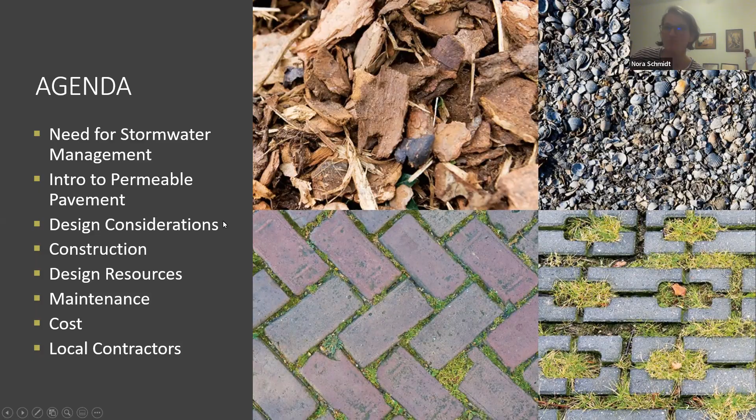This is a handy dandy graphic that the Philadelphia Water Department put together, and I think it really sums up why we need to be concerned about stormwater and what's running off your property. In your natural environment, 40% is evaporation, only 10% is running off into your local waterway, and the other 50% is going into the ground. Versus in our built environment, in residential neighborhoods and cities, over half is running off into your waterway. So permeable paving is one of those options that tries to reduce the amount of runoff and promote infiltration into the landscapes on your property.

I'll go through this stuff, but if you have a pressing question, feel free to jump in. Otherwise, I can answer questions at the end.

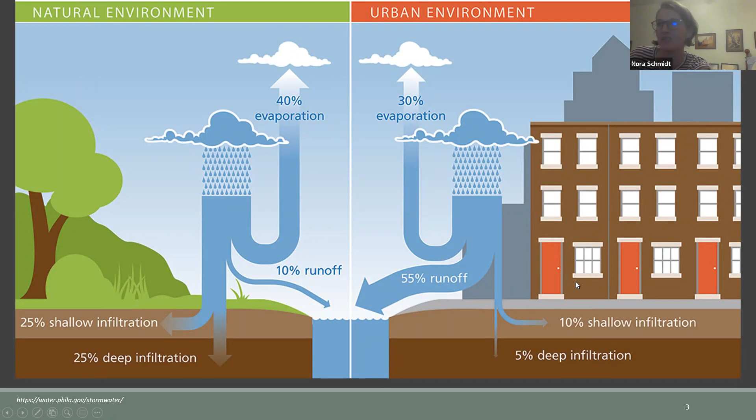Infiltration is anything that lands on a porous surface, like anything that has plants or dirt. Pavement has very little infiltration—there are dips and bumps where a little bit will get stored, but it won't infiltrate into the ground. The deeper the root system, the more infiltration, because it can follow the root structure down further. So if we just reduce paving and turn it to turf grass, that's one step in the right direction.

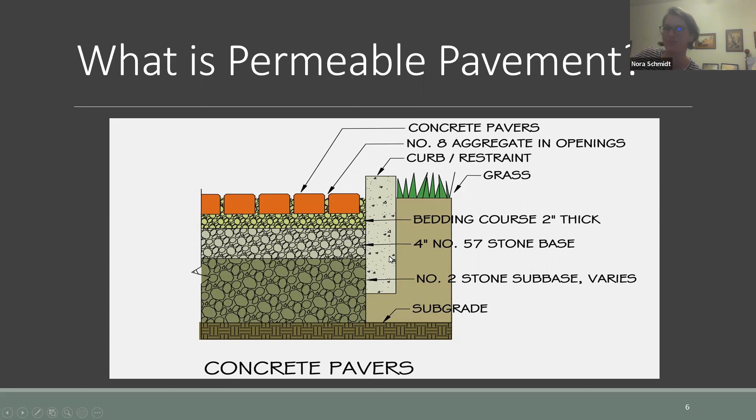Okay, so here are generically your 3 P's: your paver, your permeable paver, which is probably the more applicable stance for a homeowner to do is put a paver in. You have permeable concrete, and then you have permeable asphalt. Both permeable concrete and permeable asphalt we're not going to talk about tonight because they're basically infeasible for small projects, since the amount of material you need to acquire to make this cost effective is prohibitive.

So this is a good comment - some driveways you've seen that look like this aren't permeable, because they'll have literally mortar or concrete in between these gaps, and that makes them impervious, same as a typical asphalt driveway. So what makes it permeable is when you put the stone or sand in between.

All right, so now we get into what we're promoting as one of the more useful things homeowners can add to their property: these pavers. They come in like bricks, in all different shapes and sizes and colors, but they'll typically have something like a little block that sticks out that sets up the difference between the two blocks, giving it space on its own.

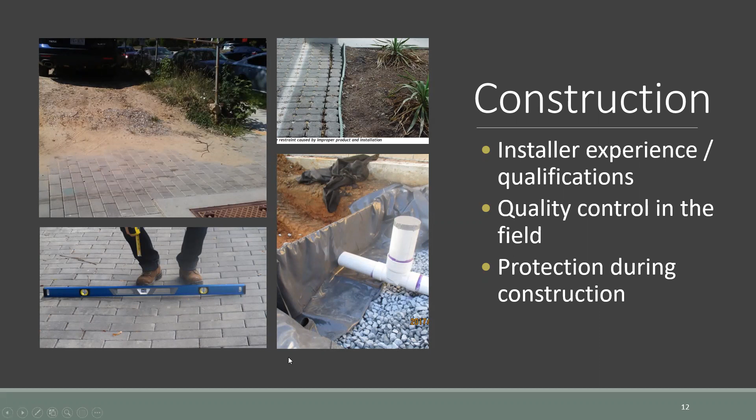So Sandy kind of got into a bunch of design-related topics, like if you have a contractor, there are a bunch of contractors that have done porous paving and pervious pavers and they will know how to do it. But if you decide you want to design it yourself, there's design guidance for homeowners. I can share the PDF, but this design guidance from Montgomery County, Maryland is really, really good for homeowners, like driveway type things.

Sandy touched on how much you could be spending, potentially $30,000 on a driveway. So I thought I'd share the generic cost: for a porous paver driveway, you're going to spend $30 to $50 per square foot, compared to less than half of that, $4 to $15 per square foot, for your standard concrete driveway. So yeah, it's almost more than double that cost.

So it is something to be aware of, but you can go the way of doing just strips of paving, just doing some sidewalk, just doing whatever. If you were going to do a typical paver driveway without the porous option, it's going to be in the realm of that cost as well.

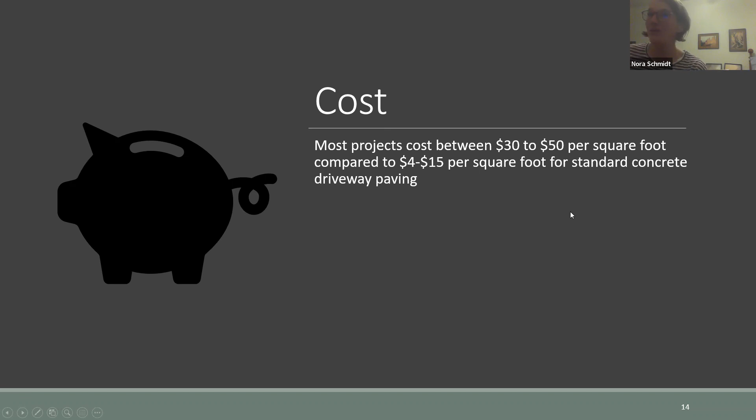All right, so touching on the maintenance aspect. As a preventative measure, during construction, place all your debris down slope of the project. Once it's installed, you're going to need to remove it. Don't dump a truckload of sand or anything on top of it. If you can, remove it and sweep it.

After a rain event, look out and see how it's doing. If it's ponding in a weird spot, maybe something is clogging it and you can just brush it off. Don't store anything or put anything loose nearby. If you could have a strip of grass and then your mulched garden bed, that's preferable.

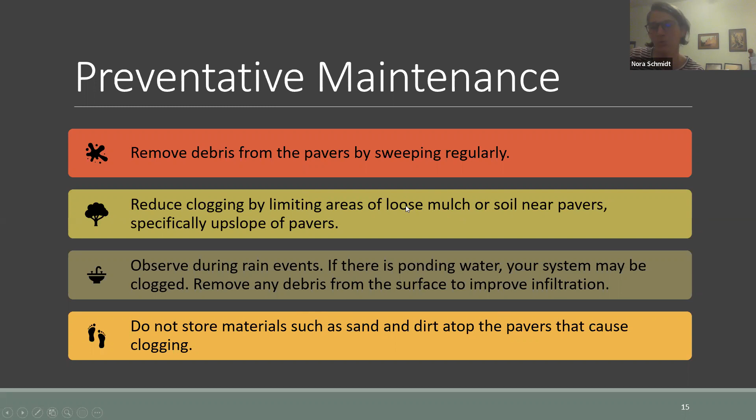All right, so then winter maintenance. Our winters are getting a little less icy and snowy, but when snow does accumulate, porous paving might actually help with ice a little bit, but it won't ice over faster. It's not going to be really that much different than your typical pavement.

And if you have somebody scrape your driveway, you want a rubber edge or a hand shovel. You don't want to be pushing things around and messing up the porous nature. Also, don't use salt - it can damage the actual chemical qualities, I think. Just use sparingly, or avoid it if you can.

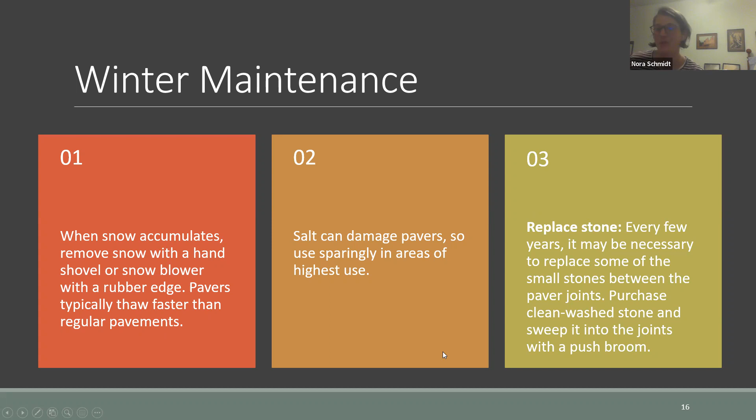And then, like Sandy said, the contractor might have to come out a few years later, maybe a year later - you yourself might have to add some sand or small stones in between the joints, just because things do move around. So that's okay.

All right, so there are a bunch of local contractors. These were a few specific ones in the Havertown, Delco area, but the Philadelphia Water Department has a list of contractors that do porous pavement, and it tells you exactly what they do. These are all people that have worked with the water department in their local residential program - contractors all over the area, some over in Delaware County. So I would start with this list first, since they're vetted by another county, another city.

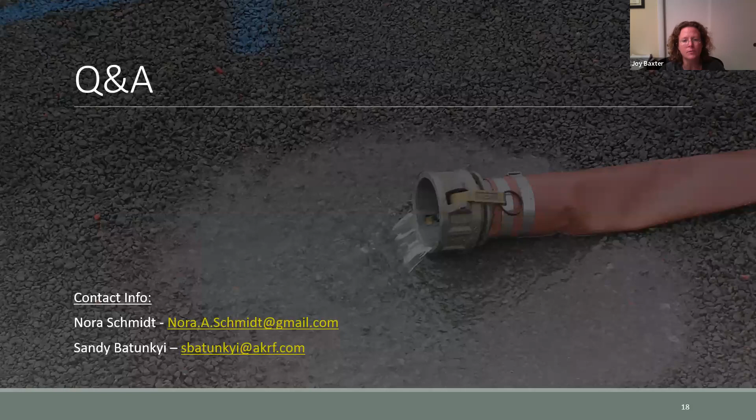Are there any other questions? We can explain more things, answer questions. I have a question, and I'm sure this depends on the product, but how much better is having these materials down versus just grass, if it's not sloped?

That's a good question. If we get back to how deep is your storage, and how much void space or area there is for water to go - grass and soil have very little. The typical grass root zone is only about 1 to 3 inches, so you're only disrupting the clay that much. Sandy, you could speak to this because you know.

I think it really depends on what your application is. Obviously, if you want to have a paved area - paved being the operative word here - these materials are much better than doing something non-porous, like regular asphalt or regular concrete. So if you want a driveway, you wouldn't necessarily want to keep it as grass. If you put in a paved driveway, going the route of porous is better than going standard.

But that being said, all things being equal, the best thing is, if you don't need to disturb the soil and things can just be vegetated, even if it's grass - the grass will literally be more permeable than either of these porous pavement options. So the question is whether it's better - it's a better product if your intention is to have an area that's paved. But if it's not paved, then just keep it vegetated, like grass or other plantings.

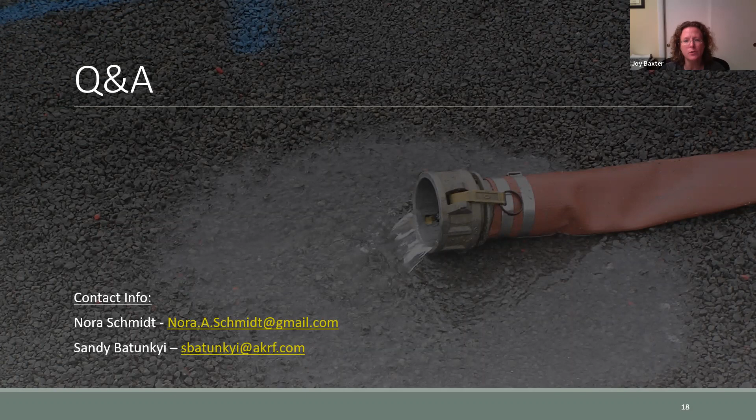I was just thinking for a driveway, if somebody was considering doing these porous pavers versus the 2 strips - I see. I would think the cost of the 2 strips would be far less than the porous pavers. Correct. Sure, yeah, of course.

Back to basics - if somebody just wanted something to be porous, they could just have a gravel driveway. That's sort of the mother of all semi-paved, porous options. But that's correct, I think. If you're looking at those concrete strips, the last time I put an estimate together for pavement, it was probably about $15 per square foot.

Depending on how much base and everything you have, it's anywhere from $4 to $15, depending on the thickness of your concrete and your base. So in some ways, it's obviously about your square footage, right? Your square footage for those tire strips is going to be less than if you were to pave over your whole driveway.

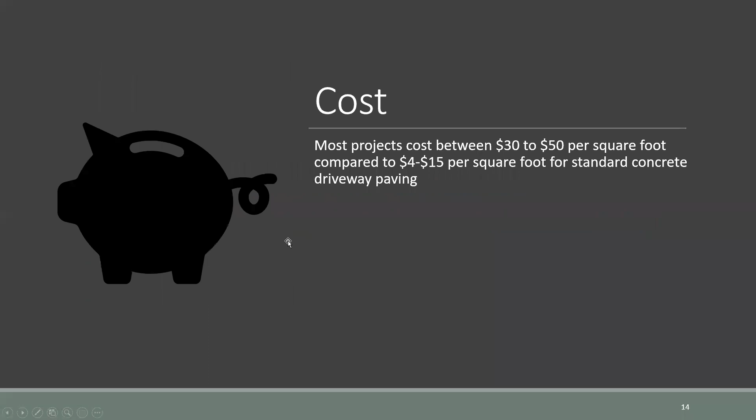By the way, so my porous pave experience is—I have a corner roof downspout that the water runs off so quickly that it's always been a waterfall over the edge forever and ever. And that sort of exposed one of the weaknesses of porous pave: there's a big divot right there where that waterfall hits the porous paving.

The other lesson learned is porous pave is really difficult for a contractor to do a good job—they really have to be skilled. You definitely don't want it for a vehicle on. I think some of the arboretums I've seen porous pave as walking paths—I think that's the best application for it.

Right. Yeah, I think it comes back to aesthetics—it looks really natural, or naturalized, I guess. And I know someone who installed Gravel-Lok. The advantage for—I don't think I would ever recommend a do-it-yourselfer to do porous pave.

With Gravel-Lok, you can actually set decorative stone, and this fellow did patterns. He worked with his gardener, laid everything in, compacted it, and then poured the polymeric material, sprinkling it over and letting it set. That sounded like an easier way to do it than what I saw my contractor do with the porous pave, where they were mixing everything in a little concrete mixer and it was like beat the clock to get it in. I think they didn't understand that you can't just screed it like concrete, you really have to work it in enough to get it strong. So it's a little more challenging.

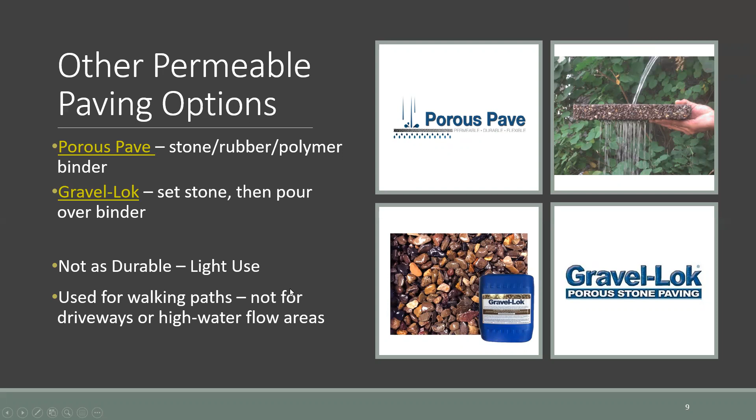Unlike old home construction, where the underground pipe sometimes goes to the street, right, which is the opposite of what you'd like to see—it's an express route to get to the street, into the storm sewer, and into the streams, which you really don't want. Yeah, there are other things you can incorporate, like drainage underneath your porous paving too, if you want to increase your storage even further than 6 to 18 inches, you could go even deeper than that. One of my pet peeves on new construction and additions—well, I have a lot of pet peeves because I'm in the rain garden business.

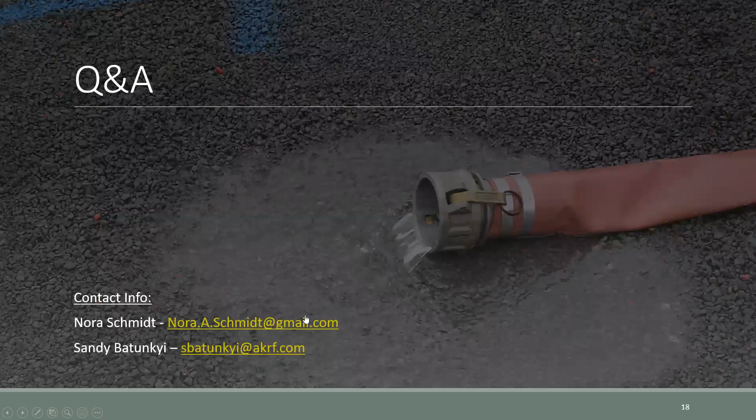I don't want to say business hobby, at a crazy level hobby, but you just see a lot of things that continually increase impervious areas, like people doubling the width of their driveways and putting little drives across their front lawn, which just doesn't help the situation.

I think now by ordinance you can't put a pipe to the street unless you get a special exception, and it's more difficult to get that kind of exception. But years ago they used to pipe things directly to the street, and you still see a lot of that.

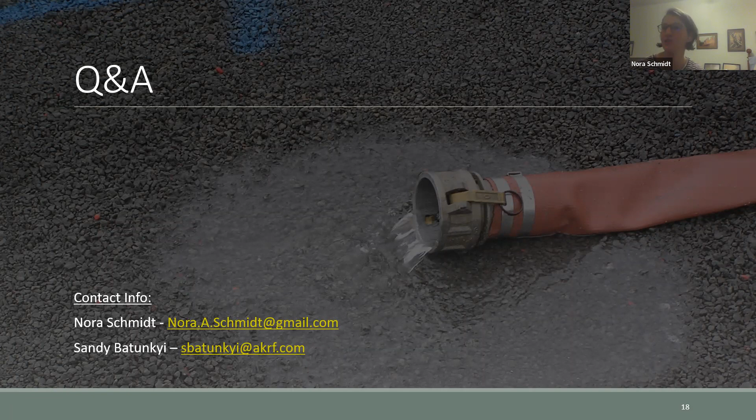So I guess the minimum anybody could do, if you have anything piped to the street, is try to pull that out and run it over your yard - that's usually the preferred method.

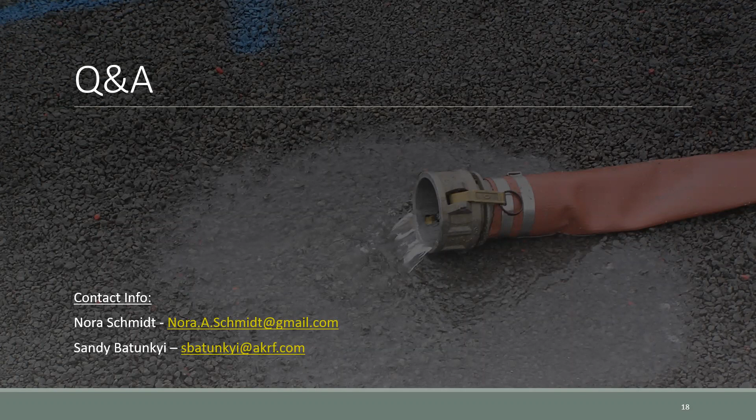Yeah, I mean, I like the idea too, if you have paths to the front door, I just love the look of natural stone. You often see this - instead of a concrete walkway to the front door, you'll see a little slate path. Some of these things are a little harder to deal with, like shoveling the slate, obviously.

But I sort of have that situation. I actually have an old concrete runner driveway that the former owner excavated the dirt in between, and he laid in old repurposed bricks with sand underneath. So I sort of have a pervious driveway - not really, it's not going to accept a huge amount of water, but it's so flat that water just sits there and it holds an inch of water and percolates before it starts running out to the street.

All right. Anybody have any last thoughts, questions? Don't see any more chats.